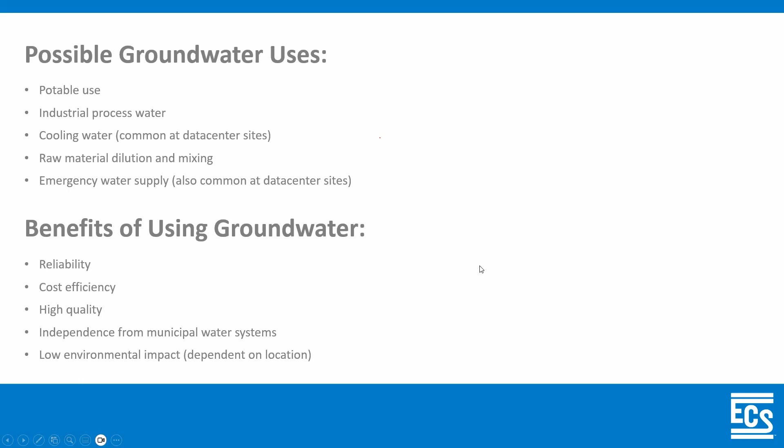So if you are in a situation where you need to develop a groundwater source, what's your first step? Where do you start? And the answer to that is really dependent on the geologic location. So I'm going to talk about really three types of geologic settings. For fractured bedrock settings and karst aquifer settings, you generally start with what we refer to as a well siting evaluation. And this is in contrast to a coastal plain sediment aquifer setting, where you would start with a feasibility evaluation. So there are some similarities to these different types of evaluations, but there are a few important distinctions as well.

Now, regardless of your setting, there are going to be some common methods, which is that after you perform these initial evaluations, the next step is going to be well installation, followed by well testing and well sampling. And so that's really what the talk today is focused on, going through these different steps that you would undertake if you were developing a groundwater source.

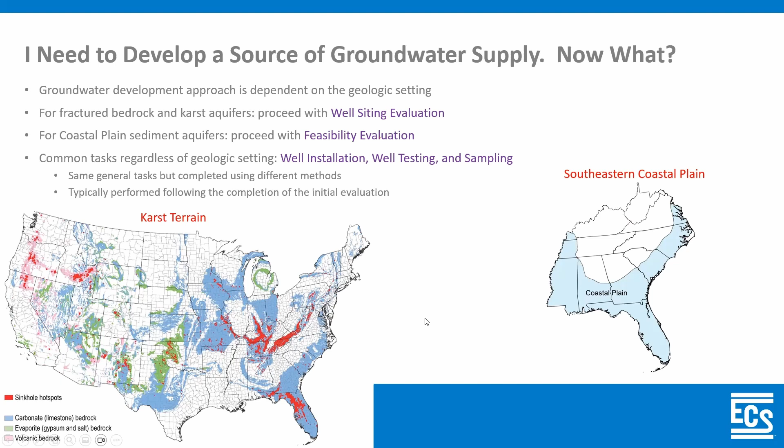Now, groundwater flow within the bedrock, because the rock itself has essentially no porosity, no permeability, the groundwater flows within fractures in the rock. And these fractures can be bedding planes, they can be fractures from expansion of the rock, but that's where the water moves. And so when you install a fractured bedrock aquifer well, you're trying to install it at a location where you intersect these fractures. Because if you install it in an area that doesn't have the fractures, you're just not going to have water being contributed to your well.

So another type of setting is a karst aquifer setting. Now, karst is comprised of limestone. And when you think of karst systems, we're talking about areas where you would see sinkholes or caves. And so what happens is you have these natural fractures in the rock, and the acidity of the rainwater interacts with the carbonate within limestone to cause dissolution. And those fractures that may have been a millimeter thick to start with can become inches thick or feet thick, or in some cases, obviously, caves can be hundreds of feet wide.

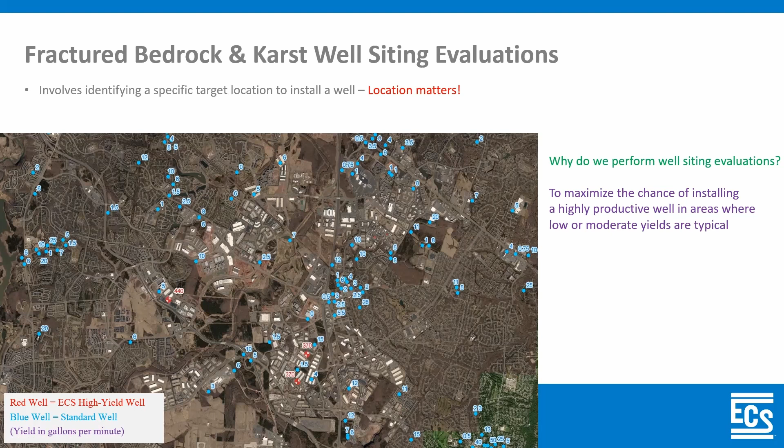But these 3 red ones are wells that we installed for a data center client where we did well siting, and we have yields of 440, 370, 370. So doing this kind of siting evaluation doesn't guarantee that you're going to get a 370 gallon per minute well, but it's a great way to increase your chances of getting a high yield.

So the first step that we do as part of these evaluations is a literature review and a well inventory search. We want to review any available geologic and hydrogeologic publications. We want to identify permitting requirements, which in a fractured bedrock or karst setting typically are not too extensive. We want to compile a GIS database, and so we're going to bring in things like digital elevation layers, site polygons, probably stream layers, all sorts of different data sources that can help us with our evaluation.

And we want to identify potential contaminant threats, because unlike a coastal plain system where you might have 200 feet of clay that prevents contaminants from migrating, in a fractured bedrock and karst system you can have contaminants migrate pretty rapidly into the aquifer. And so we want to identify those potential sources before we actually install the well.

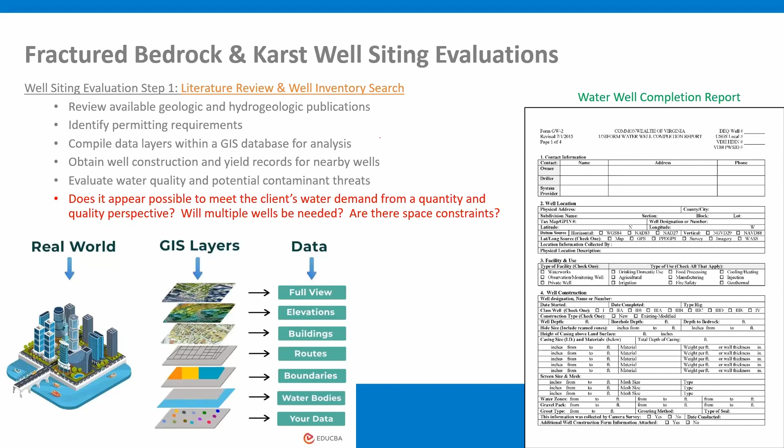So ultimately, what we try to accomplish with the lit review and the well inventory search is to figure out, does the geologic setting appear to meet the client's water demand and quality requirements? Are there going to be multiple wells that might be needed? Are there space constraints with respect to setback requirements? So these are all things that are good to know up front and that we take into account when we're siting the location of the well.

So the next step is typically a fracture trace analysis. Now, when I talk about fracture traces, these are straight line lineaments that are topographic expressions at the land surface. And what we try and do with this is we're essentially trying to identify fracture zones that are expressed superficially. And so these fractures in the rock, when they make it to the top of the rock and become exposed, you have preferential weathering that occurs. And because of that, you can get a lineament feature that's a subdued expression of topography. And that's what we try and identify.

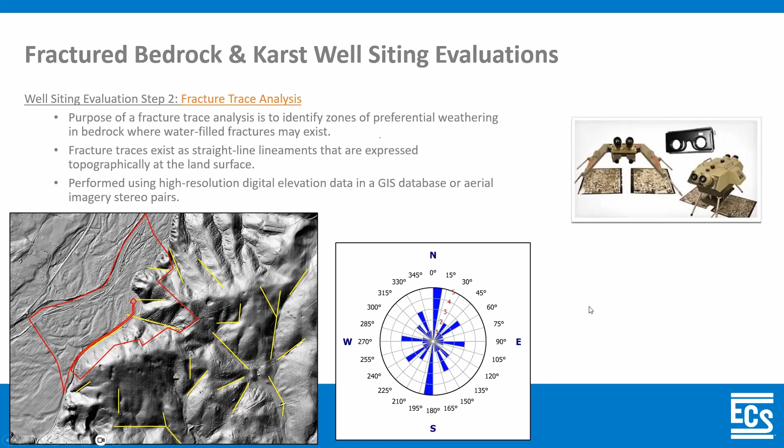Now, after we do our fracture trace analysis, we create what's called a compass rose. And you can see it here on this center graphic, where we try and identify the predominant orientation of these fracture traces, which we then use when we do our electrical resistivity survey. So the next step is the electrical resistivity surveying, or ER surveying as we call it. And what we try and do is cross these ER survey lines across the fracture traces, because the fracture traces can be great places to site a well.

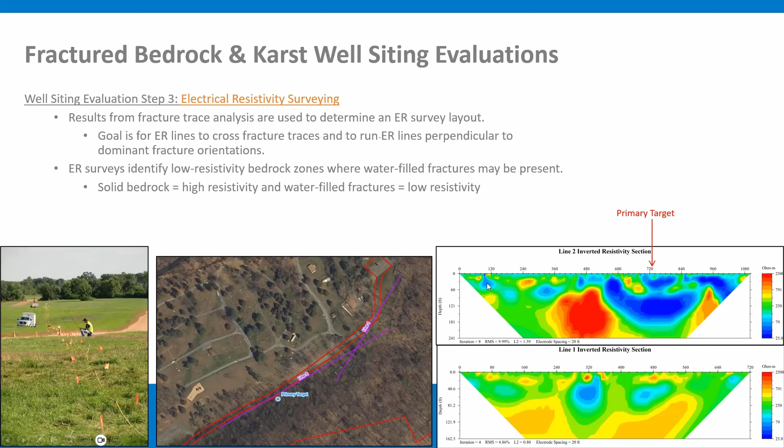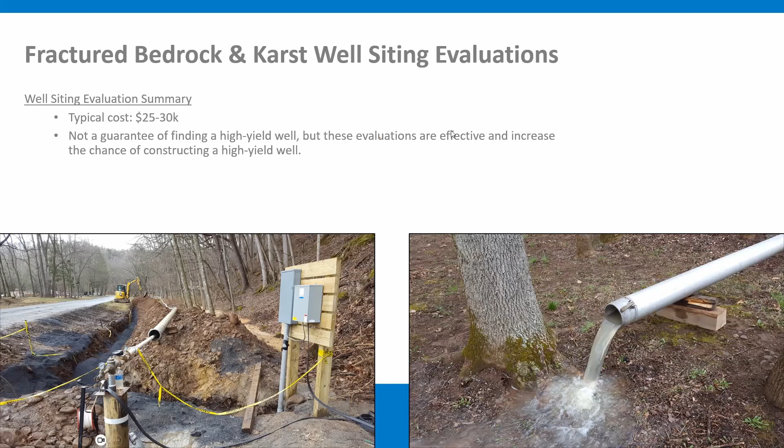So the next type of geologic setting I'm going to talk about, which is very different from the fractured rock systems, is coastal plain aquifers. So in a coastal plain aquifer, you have layers of sand and gravel that are sandwiched between confining units that are comprised of clay, silty clay, materials that really don't allow groundwater to be transmitted through it, or at least not large quantities of groundwater.

So you can see in this graphic in the bottom left, this is a pretty typical cross-section of a coastal plain system, where the dark grayish area to the far left represents crystalline rock. The light layers represent aquifers, and the orange layers represent confining units. These layers thicken as you move toward the coast, and they outcrop at the far left where the coastal plain system meets the crystalline rock. This is what we call the fall zone.

It's a really important area because it's where these aquifers are recharged. Because of the thick clay layers above them, water doesn't really get into the aquifers within most of the coastal plain. The recharge occurs at the fall zone where the aquifers are outcropped. And it's for that reason that municipalities and states are very protective of their fall zone.

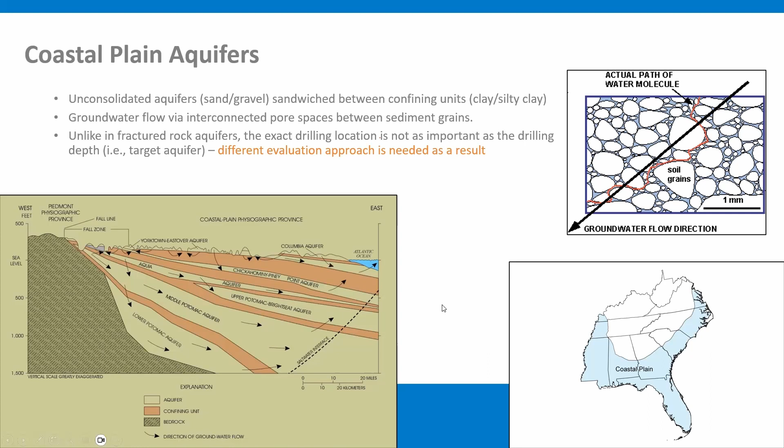Like the fractured rock evaluations, the first thing we do is a literature review and a well inventory search. These are oftentimes more extensive than what's required for a fractured rock system. We really focus the evaluation on the yield potential and the water quality of the aquifers, because you have some unique water quality concerns in a coastal plain system that you don't necessarily have in a fractured rock system, salinity being the most common concern.

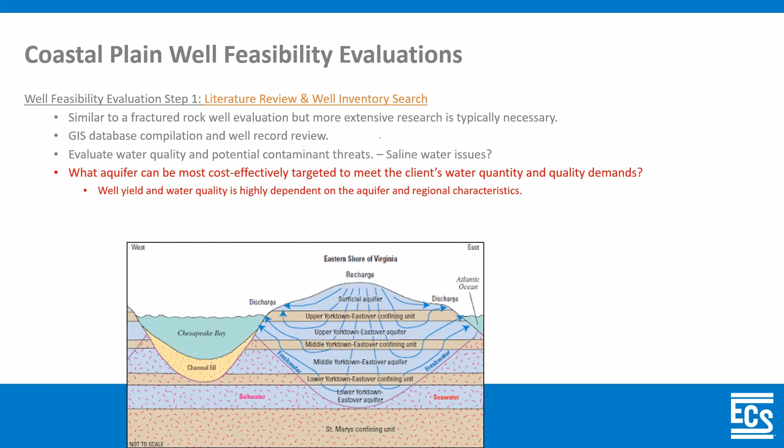So ultimately, what you're trying to do with your literature review is identify what aquifer can be most cost effectively targeted to meet the client's water quantity and quality demands. Because if you don't need to put in an 800-foot well and you can get away with a 200-foot well, that's going to save you a lot of money. So that's really what you're trying to identify.

So the next step in a feasibility evaluation in the coastal plain is to review permitting requirements. This is really important because permitting requirements in coastal plain areas are often much more stringent than in fractured rock systems. In a fractured rock system, you're typically going to need a permit to install the well. This commonly consists of submitting a form, a couple hundred dollar fee, and maybe someone from the health department will come look at the well's location.

Contrast that with the coastal plain, where water withdrawal permitting is usually required. These permit applications can consist of numerous forms and a lot of detailed information. It can be over $10,000 to submit these packages. So it's just much more of a process. The reason for this is that overpumping in the coastal plain can cause a variety of issues, like groundwater level decline, saltwater intrusion, and regional land subsidence, that really aren't issues in the Piedmont area or further inland.

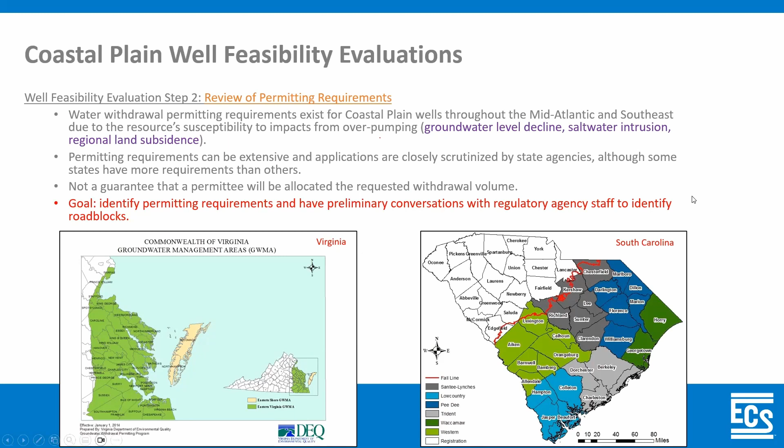So I have a couple maps here showing Virginia and South Carolina, but each state that I'm aware of in the Mid-Atlantic and Southeast has water withdrawal permitting requirements. You can see how the areas where water withdrawal permitting is required coincide with the coastal plain, and that's the basis for determining whether or not it's required. So the goal of this part of the evaluation is to identify permitting requirements and start to have conversations with regulatory agency staff to identify roadblocks in advance.

The next step is to develop a preliminary well design and come up with some budgetary drilling costs. The complexity of the preliminary well design is going to depend on the needs of the client. It can be as simple as a narrative description, writing out some general well specs, or it can be a full graphical depiction of the well with detailed specifications and writing driller bid documents. It just depends on the situation.

We also like to get the budgetary pricing from drillers so that the client knows in advance what sort of costs are going to be involved with this well installation, because these types of wells can be pretty expensive depending on the construction. So at the end of the well feasibility evaluation, we should have a good understanding of the target aquifer, drilling and permitting requirements, and have a preliminary well design. These feasibility evaluations typically cost about $10,000 to $15,000, and considering the cost of these wells, it's definitely money well spent.

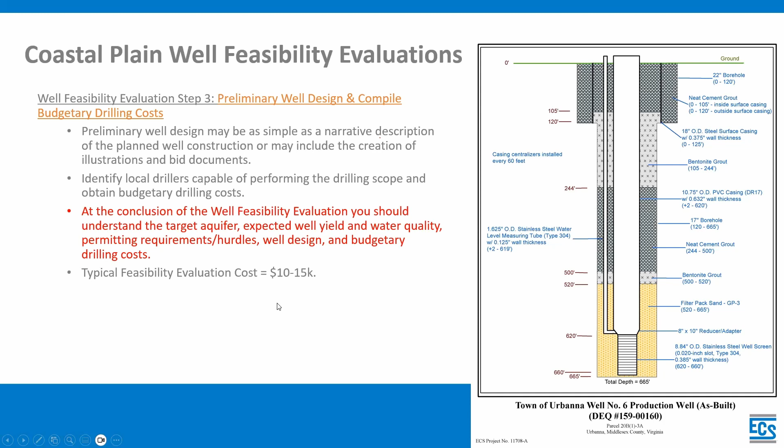All right, so after you do your feasibility or your siting evaluation, the next step is going to be to actually install the well. So I'm going to talk about well installation and some of the things that are unique to each of the three types of geologic settings that I mentioned. So the first type of setting I'm going to talk about is fractured bedrock aquifers. This is the least expensive type of setting to install a well, commonly $20,000 to $25,000 to install a well for a commercial industrial site.

And a really simple but pretty representative schematic is here on the right. It shows that what you do is you essentially drill a borehole through the weathered rock material. You place either steel or PVC pipe to keep that overburden material from collapsing into the well. You grout that pipe, and then you drill an open borehole through the rock. Pretty simple.

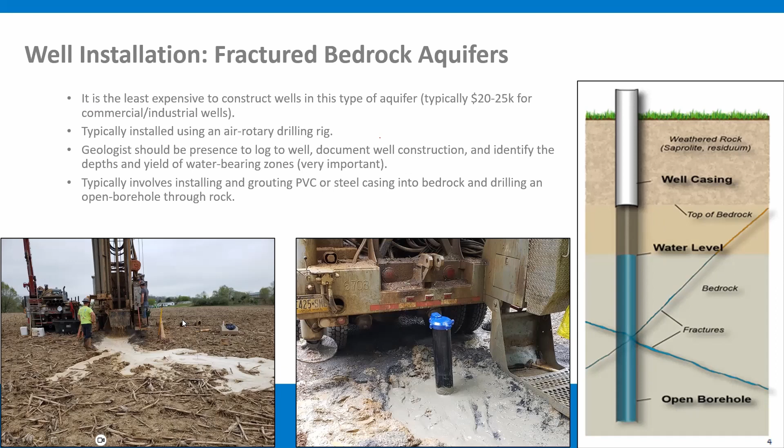Now, karst aquifer wells, the construction is kind of similar to fractured rock, but there are some unique challenges associated with karst wells. And because of these unique challenges, they're more expensive. So I would say here it's generally $25,000 to more than $1 million for a karst well. And the biggest determination is going to be how large of a well are you installing?

We just did a well a few weeks back in the Shenandoah Valley of Virginia that when we tested it, we found out that that well could produce more than 5,000 gallons a minute. And the well itself was about $700,000 because we had to have very large casing. We had to have a specialized drilling rig called a dual rotary rig. We had to develop the well for a couple weeks. So you can get some really high costs, but if you're doing a 6 or 8 inch well, you only need a couple hundred gallons a minute. It's going to be much cheaper and it's going to be much closer to that 25,000 number.

So I mentioned the dual rotary rig, which sometimes is necessary, but more commonly, this type of well is going to be installed using an air rotary drilling rig, oftentimes with foam additive to add that viscosity and bring the cuttings up to the surface, since you can have air lost into these large caverns.

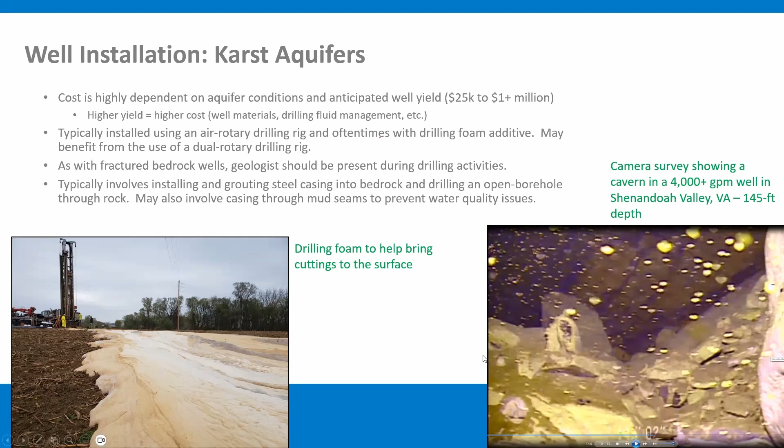The last type of well I'm going to talk about is coastal plain wells. For commercial or industrial wells in the coastal plain, they can be quite expensive. They can range from around $100,000 to a couple million dollars, depending on the well and the well's yield. These high costs are usually due to high well material costs, especially these days. Longer drilling times: whereas you can install a fractured rock well in a couple days, it can take 4 months to do a full coastal plain well. Increased well development time, permitting requirements.

So the construction of a coastal plain well is very different from that of a fractured rock or a karst well. What you essentially do is you use a mud rotary drilling rig, and mud is the drilling fluid. And when I say mud, I don't mean mud like you would scoop up from a puddle after it rains, but this is bentonite that's added to water. So you get a viscous drilling fluid.

And what that mud does is when you put it down the hole as you're drilling, the viscosity of it keeps the borehole open and stable so that those sands and those swelling clays don't expand into the hole and cause the hole to collapse. In addition, it adds the viscosity that you need to bring the cuttings up to the surface as you drill. So you start by drilling your borehole, and once your borehole is drilled to the correct depth, you install a well screen.

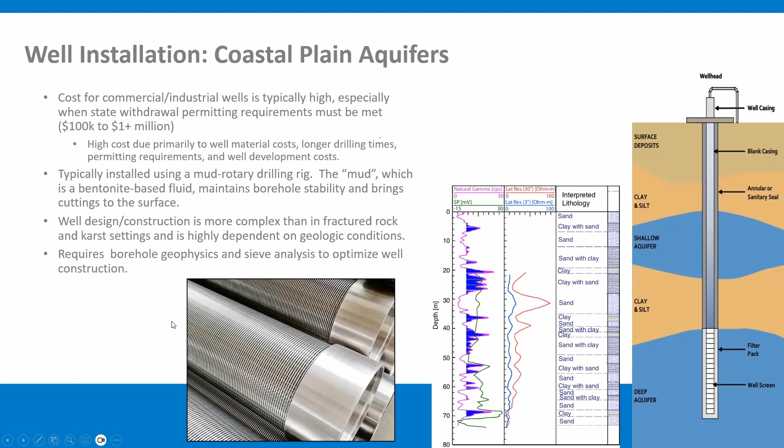Okay, so at this point, we've installed our well. And at that point, you need to ask yourself, is this well worth testing? That's the big question, because you don't want to spend the money to do well testing if the well's not viable. So when you drill a well, at least in a fractured rock and karst system, the air that the drilling rig adds down into the well causes water to come up out of the well. And how much water comes out of the well is a function of what the well can produce.

So in a high yielding well, you're going to have a lot more water coming out of it than a low yielding well. And that's called an airlift yield. So you look at your airlift yield and determine if this well seems like a viable well for your development, and if it's going to be adequate to meet the full development needs, or if you might need some additional wells. So if you determine that it is a viable well, the next step is going to be doing aquifer testing.

Now we like to do a couple different types of well tests. These are a step drawdown test and a constant rate test. And there's several purposes for doing these tests. The first and oftentimes biggest question for a client is, what is this well's maximum long-term sustainable yield? How much water can the well produce? You can use the data to estimate pumping impacts to other on-site or off-site wells. You can calculate aquifer properties, identify boundary influences that impact well performance and the well's yield, calculate well efficiency, identify preferential pump placement depth. So it's really useful when trying to determine how you can operate your well.

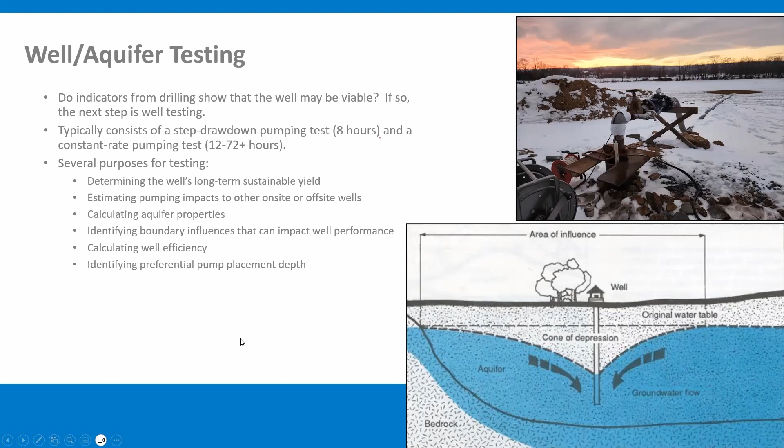So the two types of pumping tests. The first is a step test, and we do a step test before we do the constant rate test. The step test consists of pumping the well at increasingly higher pumping rates, which we call steps. So the way we like to do it is we perform 4 steps usually, with each step lasting 2 hours. And we go right from one step into the next. So I have a graphic here, the upper right graphic. This particular test, we did 3 steps with each step lasting 3 hours.

And the y-axis is the drawdown, and the x-axis is elapsed pumping time. So you can see with this first step, we did 200 gallons a minute. We had really rapid drawdown at the start, which is very common. And then it starts to stabilize. After 3 hours, we increased the rate to 250 GPM, and we get the same type of response. And finally, for our last step, we increased it to 275 gallons a minute, and we had another increase in the drawdown. And so each one of these groundwater drawdown patterns, it looks like a step.

The next type of test that we'll do after the step test is a constant rate test. Now, the rate we use for this is going to be dependent on our step testing results. And typically, we like to do this test at a rate that's very similar to the rate that we plan on using as an operational pumping rate. These tests, the duration varies. They're commonly 24, 48 hours, but they can be 3 days or longer.

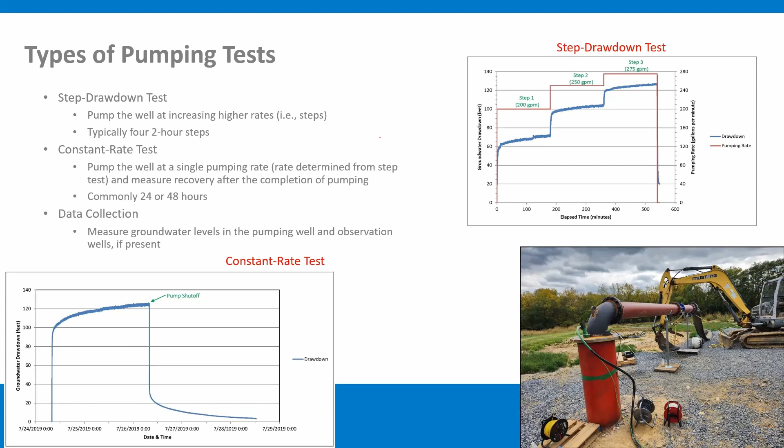The last step is going to be water quality sampling. So the parameters that we will have our water quality samples analyzed for is very much dependent on client specific needs. And it's also based on regulatory requirements. So if you're doing a public well, your state health department is going to have a list of parameters that you need to analyze that water for.

But additionally, a client might have some interest in the water that goes beyond what the state requires. So it's very much dependent on the project specific needs. And these water quality samples we will usually collect during the final hour of the constant rate test.

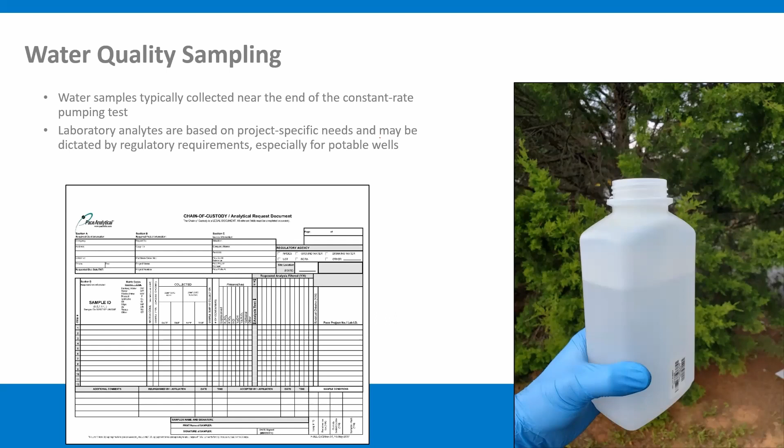Okay, so I'm finishing up here, and I'm going to end the presentation with a brief case study that we finished a couple months ago. This was a project in Urbanna, Virginia, and it was for the installation of a municipal well. And this is in the coastal plain. So the center graphic shows the location of Urbanna. It's on the Middle Peninsula along the Rappahannock River, about an hour or so east of Richmond.

Now, the reason that we were doing this project was kind of interesting. The town has 500 residents that their municipal system provides water to, and they have two wells as part of their system. They have a water withdrawal permit that allows them to withdraw a combined volume of up to 400,000 gallons per day.

One of them was installed in 1963, but they both have the same problem, which is that the well screen and the filter pack, which is that sand on the outside of the screen, doesn't just screen one aquifer, it extends up the well and screens multiple aquifers, which in Virginia is illegal. It wasn't when this was installed, but it is now. And so they're being required by the Department of Environmental Quality to replace both of their wells. We started with one, and the next one's going to be in the next few years.

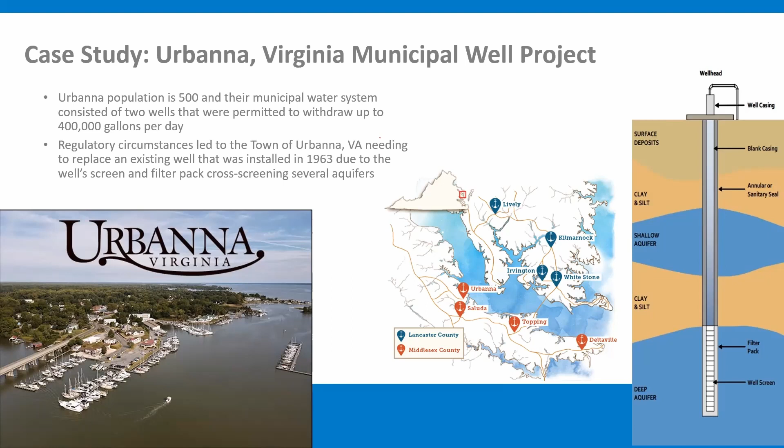Essentially, water from whichever aquifer has a higher pressure will migrate to the aquifer with the lower pressure. And the reason that that can be problematic is you can have contamination present. You can have salinity that can migrate. And you can have just water chemistry issues that are caused by the mixing of water of two different chemistries. So that was the reason why we're performing this well replacement.

So the first thing we did was we performed a feasibility evaluation. And as part of that evaluation, we got a lot of good information about their existing wells and about the hydrogeologic setting of the region. So this table, it shows the general hydrostratigraphy. We have a couple of aquifers, the surficial aquifer and the Yorktown Eastover aquifer, that directly overlie one another. And then we have some confining units, and sandwiched between the confining units, we have the Piney Point aquifer, the Aquia aquifer, and the Potomac aquifer.

Now, these elevations are based on publication data, and they're very much estimated, because you can see here that the Piney Point aquifer has a thickness of 90 feet. In reality, the actual productive zone of this aquifer is about 10 feet thick, and it actually has a very low productivity. So if you install the well in the Piney Point at this location, trying to get 400 gallons a minute, you're going to get a fraction of that, but it's still going to be an expensive well, and that kind of speaks to why we do these evaluations in the first place.

So in the end, we found that the well being replaced was 662 feet, and that the Potomac aquifer was going to be the only viable target that would meet the client's demand and water quality needs. We found the Potomac aquifer at this location is of great water quality, no salinity issues. And we had conversations with the Department of Environmental Quality, and we found that they would be allowed to do a minor modification to their water withdrawal permit, which in contrast to a major modification is a significant cost savings, much less effort required.

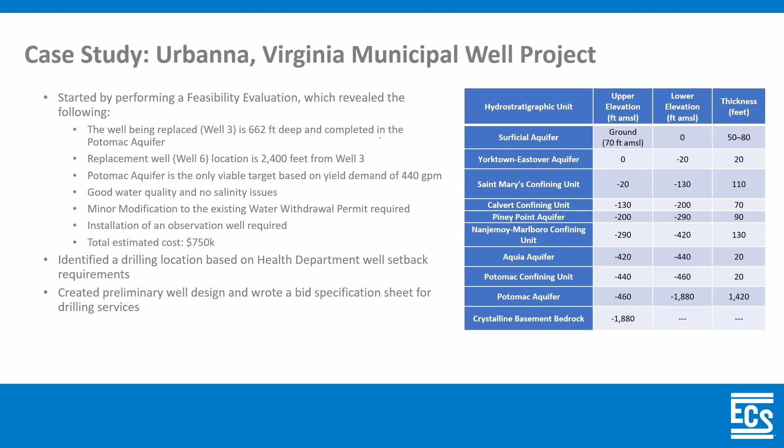So the town ended up obtaining USDA grant funding, and that took a year and a half. So there was a pretty long lag in this project. But we began site work in April of 2023, and the well was finished in August 2023. So again, that speaks to how long it can take to install these larger coastal plain wells.

And we used our sieve analysis and our geophysical borehole data to optimize the well screen and the filter pack gradation so that we would have as efficient of a well as possible. Because when you have wells that are producing hundreds of gallons a minute, having an efficient well can save tens of thousands of dollars in power costs each year, and that's largely a function of the well's construction.

Additionally, with an efficient well, you can have less drawdown in the well, which when your pump placement is regulated by a regulatory agency can be of critical importance. So again, we used the data that we collected from the geophysical borehole data, the sieve analysis, cuttings collection, and we finalized our well design. And again, ultimately in August is when we completed both of the wells.

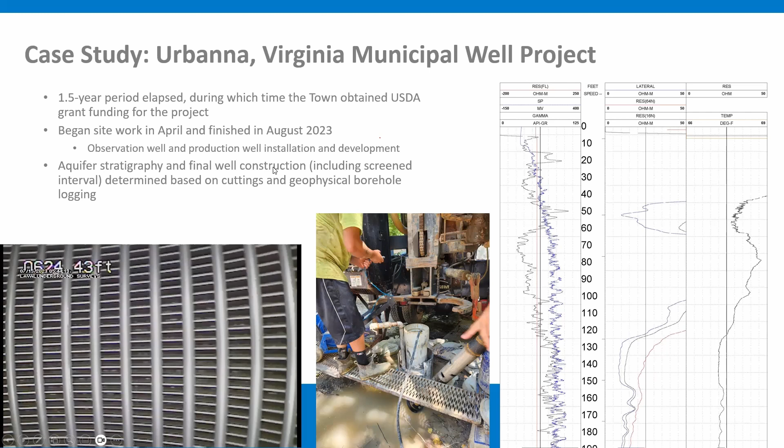We did a 48-hour test, performed our test at 440 gallons a minute. We ended up having only 27 feet of drawdown over the course of that 2-day test. A specific capacity of 16.3 gallons a minute per foot, which is very good. And after we finished our test, the water level in the well recovered to 96.1% of the pre-test level after 1 day.

Sampling confirmed that the water was of excellent quality, and the town was going to have to do very minimal treatment, which when you're a municipality and you're talking about treatment requirements for surface water versus groundwater, this is what you want to see, because the treatment costs can be very high with a municipal surface water source.

We did projections based on this data, and we projected that after 100 days of continuous pumping without any recharge, the water level in the well would be at 198 feet, which represents 32 feet of drawdown. And the DEQ requires your pump to be set above the top of the aquifer, which means that the maximum allowable pump depth in our well is 613 feet.

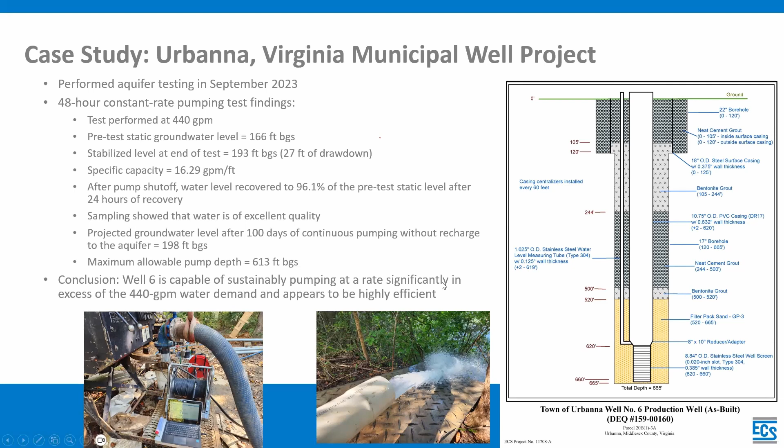Okay, so just to summarize, our recommendations are that before you start a groundwater supply project, you start with the feasibility evaluation or a well siting evaluation. To do that due diligence work, that's going to help you make informed decisions, and ultimately can help you save a lot of money in the long run.

Project approach and your well yield potential varies quite a bit based on your geologic setting. Likewise, project costs are highly variable depending on geologic setting and well construction, and your yield is mainly what drives that.

Permitting requirements, depending on your state and location, can be negligible or very strict, with the most strict requirements being the coastal plain. And pumping tests are highly recommended. You get a lot of useful information that can inform you about what your well can produce from a yield operational perspective.